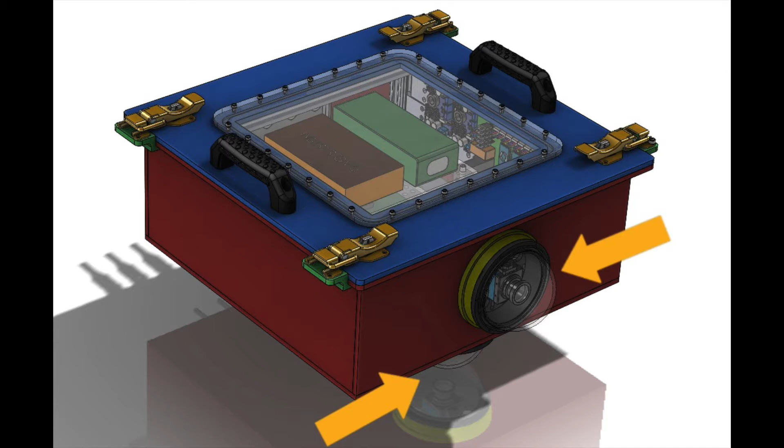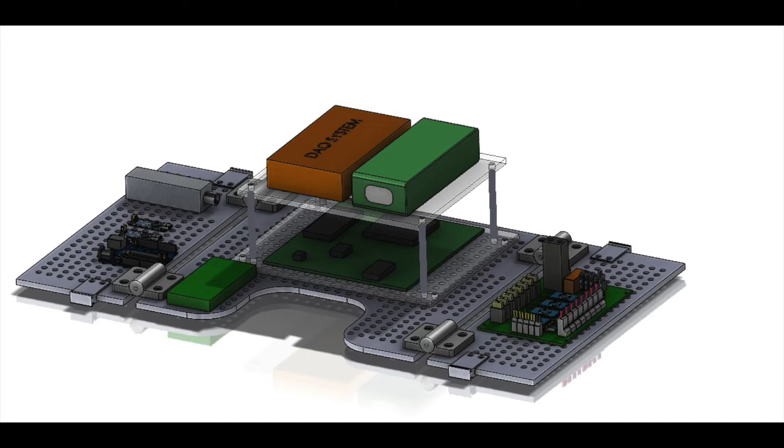Lantern's hull is a box-shaped, waterproof electronics enclosure made of welded aluminum 6061 sheets. Key features of the hull are its gasket-sealed, removable lid, its forward and downward facing camera enclosures, its connector bulkhead that interfaces the internal electronics with the external electronics exposed to the water, and its internal shelving unit that's connectorized and can be entirely removed from the hull for ease of maintenance. Manufacturability and maintenance were the two primary drivers in Lantern's hull design.

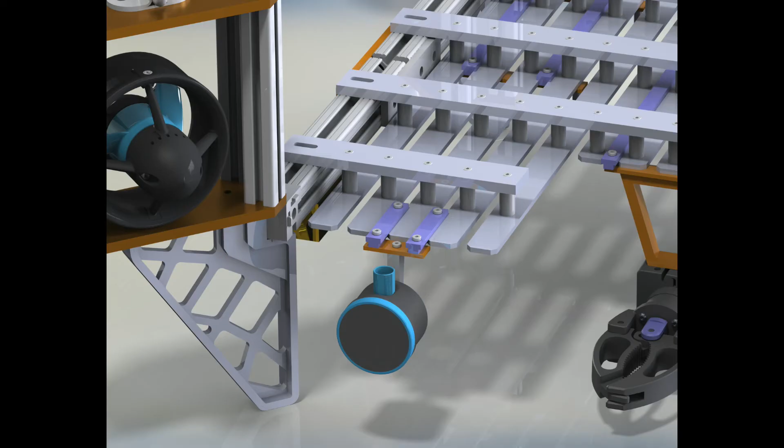This year, the team opted for a modular design for both the frame and hull. The goal was to greatly improve the accessibility of all components on the sub in order to minimize the time spent on maintenance. The frame must be able to provide mounting surfaces for sensors, thrusters, ballast, and various mechanical devices. This is achieved by standardizing how all components will be mounted onto the sub. The frame uses a custom T-slotted fixed rail design for components to be quickly slotted in, then simply locked into place by a single bolt or set screw.

Another improvement over previous generations of subs built at Cal State LA is optimal component placement. In the past, to get access to a specific component required the removal of other components in the way, which can take up to a whole day to disassemble and put those components back into place. The new system aims to provide better mounting solutions by placing the components that are likely to be swapped out at more accessible surfaces, and each mounting surface will be independent of one another, eliminating the need to remove other components in order to get access to another one.

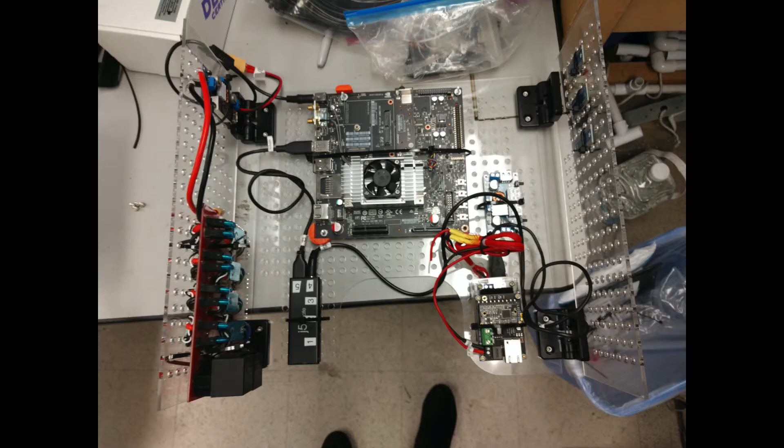Prior to Cal State LA's transition to online classes and remote work in response to the COVID-19 pandemic, the mechanical team had made solid progress in manufacturing Lantern's mechanical systems. 90% of our machining and water jetting had been completed, and we were preparing for welding, assembly, and integration.

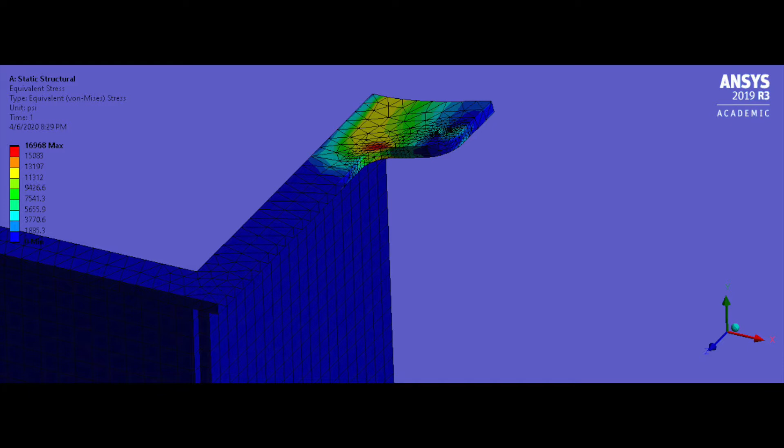Since the transition to remote work, the mechanical team has conducted static and fatigue analysis to ensure our designs were robust enough to withstand expected loading conditions with a reasonable factor of safety and that they would last for years to come. We conducted stress analysis on our latch points, weld joints, vehicle legs, and our lifting lugs.

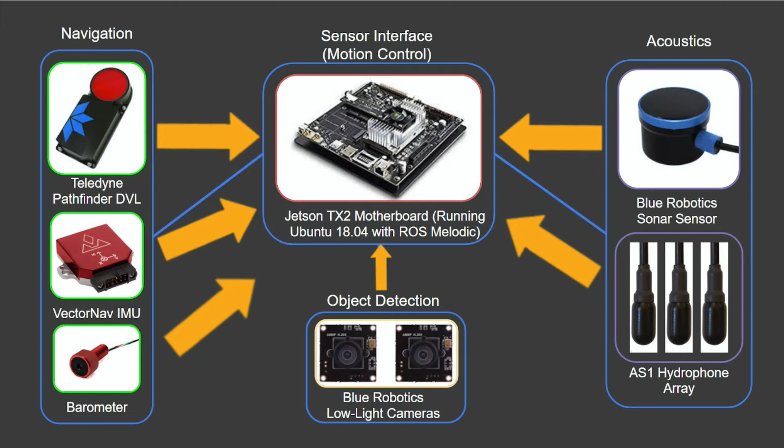Lantern's electrical system consists of a motherboard, sensors, microcontrollers, and a power distribution board. The sensors include a barometer, an IMU, a DVL, a sonar module, cameras, and hydrophones. Each sensor provides the motherboard with information about the vehicle's environment, which can be used to interact with its surroundings accordingly. Some of these sensors require microcontrollers for data processing before the data is sent to the motherboard to avoid using resources that are reserved for image processing and decision making. The motherboard contains the state machine that outputs movement commands for the motors.

This year, the electrical engineers on the senior design team focused on the development of a smaller power distribution board, an active tracking system using the Blue Robotics ping sonar sensor, and the development of an acoustic localization system using hydrophones.

Hello, my name is Viraj Bhakta, and I am part of the computer science team for Cal State LA RoboSub. The computer science team is divided up into two sections, the computer vision team and the mission planning team. The computer vision team's goal is to use images from the camera feed for object detection and image recognition. The technologies they used were YOLO, You Only Look Once, Darknet, and OpenCV.

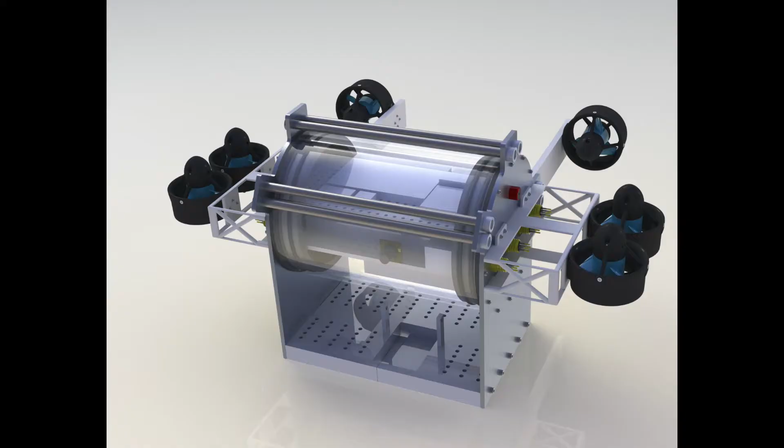The frame and hull team has had 2 primary design goals in mind from the beginning. We wanted to make it easy to access the internal components of the sub, and we wanted to make it as hydrodynamic as possible. To achieve these, the internal components can be accessed by just unthreading these 6 nuts that you can see around the top of the sub. And once you do that, the entire side can actually come off. You'll see some screws down at the bottom, but those aren't actually threaded all the way through. We filed off the threads at the end so that they act more as pins to hold the bottom plate in place.

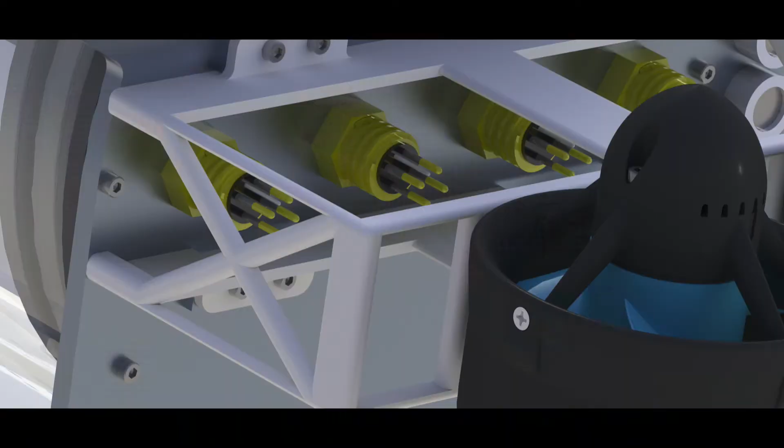To improve the hydrodynamics, we made it so that the rounded section of the tube was in the direction of motion, as well as rounding off all of the edges of the other parts, such as the thruster mount that you can see here. And for the sections that we couldn't do that with, such as the edge of the aluminum side plates themselves, we've instead minimized the surface area that would be perpendicular to the direction of motion.

This year, our team tried something new by using a Raspberry Pi as our motherboard with no other microcontrollers. The Pi was responsible for sensor data acquisition, running the controls code, computer vision, and doing the decision making. In the past, the team has used Arduino boards for sensor interfacing, but our success in this method has opened our eyes to other possibilities.

The controls for Donphan were a straightforward implementation of PID systems for each axis of movement, responding to commands sent from the state machine. As for mission planning, Donphan relies on a simple state machine loop that searches for an objective, approaches the objective, executes the task, then disengages and records the completed task. Since we lack hydrophones, we are dependent on what we can see from computer vision, leading us to focus on completing tasks with a heavy visual element such as the gate task.

Each state related to the task is responsible for obtaining relevant data from the sensor modules, as well as controlling the submarine. Each approach and execution state is unique to the task, allowing the programming and testing of specific tasks without the need to have the entire state machine running. It also allows for setting a time limit on tasks, making the submarine move on if the task is taking too much time. This modularity of the system will allow for greater reuse of code, as well as faster modifications without disturbing the function of other task states.

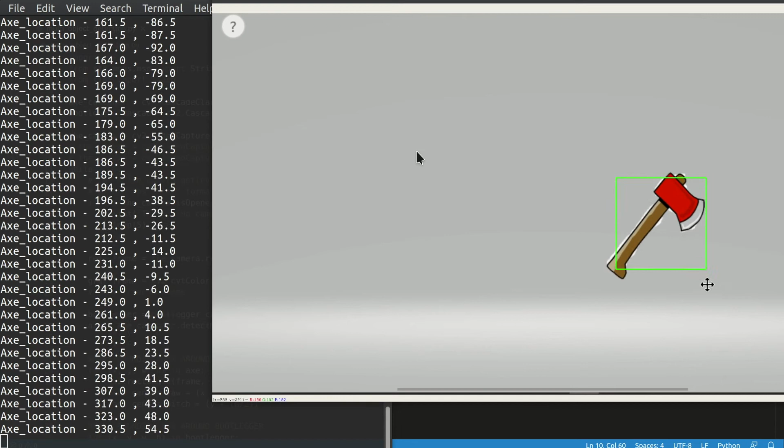This year's computer vision team was tasked to develop a program to detect and classify objects within the course. In order to do this, the team decided to use OpenCV's built-in Cascade classifier. After successfully developing a classifier for objects within the course, the team's next step was to test. In order to test that our program worked, we inputted video into our program and had it put out two things: what it was looking at and where it was looking at relative to the camera.

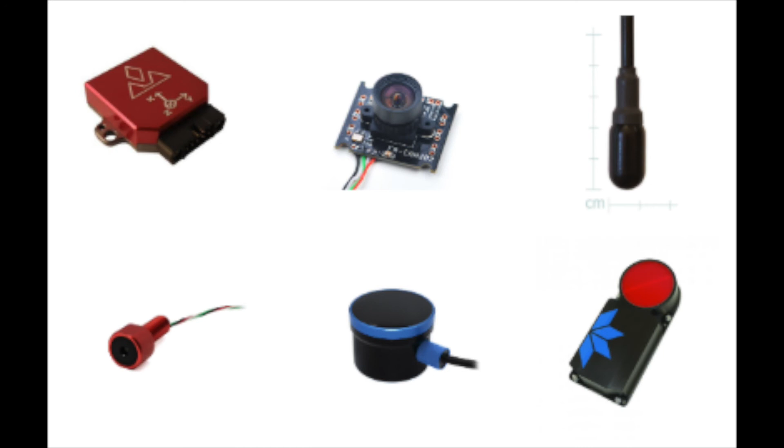Our strategy this year was to develop two different vehicles to complete different tasks during the competition. Lantern would be equipped with hydrophones and attempt the tasks marked by acoustic pingers. Meanwhile, Donphan would get style points from the gate and attempt the buoy tasks using its less sophisticated hardware. This strategy was devised in consideration of our limited budget and team organization. We reused several expensive sensors from previous years on Lantern to provide it with more capabilities, while Donphan was created with less expensive hardware and was intended to help our lowerclassmen learn about the project for future years.

Our team also explored the possibility of inter-vehicle communication using computer vision, but we did not have the chance to test or incorporate this into our competition strategy. While this year's team worked hard on programming and simulations outside of the lab, our members who will stay on the team next year have been working hard to organize workshops, presentations, and other ways of allowing members to participate in the RoboSub project remotely. Our advisors are even working on a full robotics course for students to take that will prepare them for RoboSub once students are allowed back in the lab.

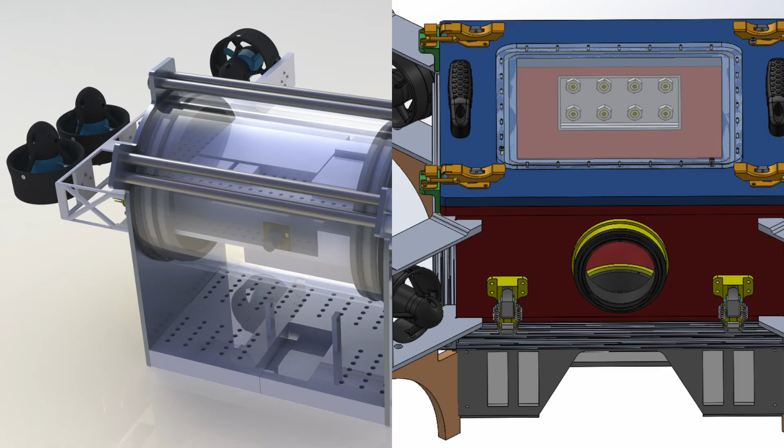While we're sad our subs were left unfinished in the lab, we hope you'll get to see them swim in San Diego in the summer of 2021.